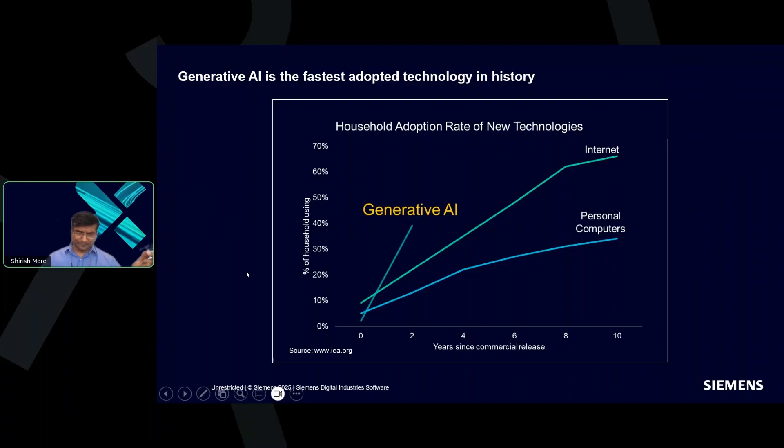So when we talk about AI at Siemens, we are not only talking about generic consumer AI or experimental prototypes here and there. Our focus is on industrial grade AI—AI that meets the strict requirements of engineering workflows. Yes, there is statistically predictive behavior going on, but how can we make it more deterministic, and how can we make it such that AI can be used in regulated environments, inside of your enterprise?

So what makes Siemens different is that we understand the product data, and we understand the engineering context and domain constraints that consumer AI models do not capture. In the case of Siemens, our goal becomes to help customers build a truly sustainable digital enterprise, where AI is grounded in historical data that was approved and released. The AI is grounded in reliability, security, trust, traceability, and industrial value.

And what that means is that industrial grade AI enables customers to trust and scale AI across their entire product life cycle.

The power of generative AI has shown—we all know the power, right? It's learning things from public data domains, things like text, images, audio, video, code. We use our smartphones day in, day out to search things. What's really happening behind the scenes is that the AI models getting used in public data domains are using the language of the internet. That's what most consumer tools are built on. They perform extremely well, but they are trained on open, unstructured data.

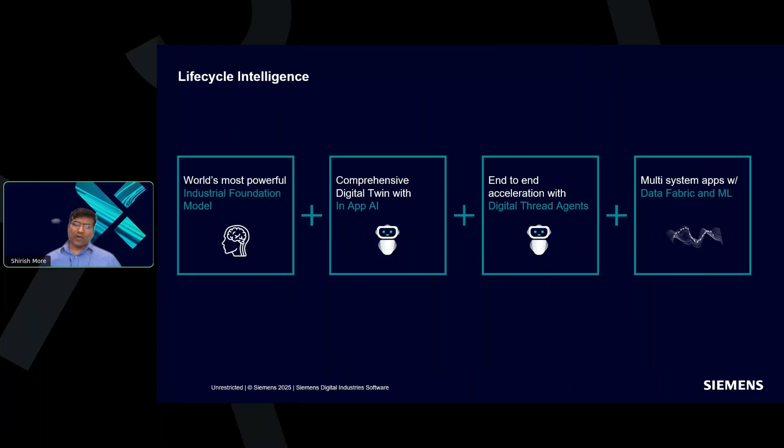When you combine these four layers, you unlock an intelligent reasoning application, an end-to-end engineering environment where data, machine learning models, and AI agents work together across the full product life cycle. That's the beauty of having AI directly inside of your application.

So let's jump into Designcenter NX and see AI in action.

Designcenter NX has been steadily advancing engineering intelligence over multiple releases now. We were in fact the first CAD product in the industry to introduce adaptive UI, or AI-powered capability, long before Gen AI or generative AI became mainstream. And that early innovation was recognized.

You can see that we received a number of awards, and since then we have expanded those predictive AI capabilities in every single release, adding features like selection prediction, region recognition. We got some nice Discovery Center recommendations going on based on how other users in the community are using AI and NX applications, all designed to help users realize efficiencies throughout their product design lifecycle. We help users automate repetitive steps and make expert workflows more accessible now inside of NX.

And now, the rightmost column there, with the introduction of generative AI, we are now entering the next phase, wherein we are bringing Copilot inside of Designcenter X NX, as well as we are introducing workflow guidance, wherein the Copilot and agents can suggest things as the designers are working in NX.

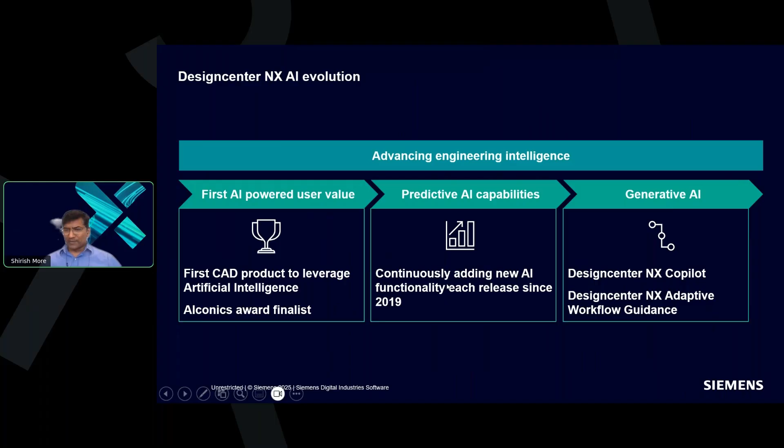So let's jump into Copilot. Copilot is our engineering-focused generative AI that brings expert-level guidance directly inside of the NX application. It interprets the user intent, and it can translate the prompts into domain-specific commands. You will see both in NX and in Teamcenter how the user doesn't have to go and search for commands.

The user can just say, I am working on this design, can you help me optimize it? And it understands the intent and then generates a nice list of things the user should perform. So there are some nice things going on here.

Behind the scenes, we are leveraging a specialized model that was trained to understand the engineering language, as well as translate those prompts into APIs, which can then execute the commands. So in the end, the result is much faster execution of a complex task, reducing onboarding time.

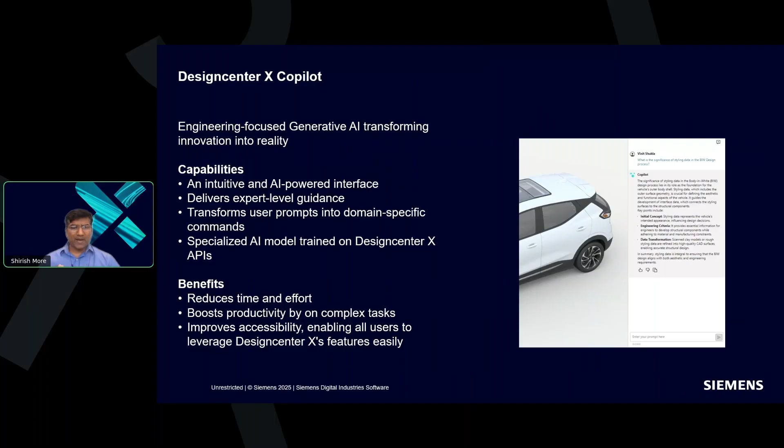In a number of these videos, I myself have authored this to show how, even though I've never worked on certain areas in NX, I'm getting help from Copilot, and it really helps reduce the onboarding time, improves the accessibility to the knowledge that Copilot has learned from technical documentation, from industry specific best practices, from historical data. And that's the power of having the Copilot inside of NX.

So here is a quick demo. You can see how I'm working against this automotive early concept design, wherein my task is to optimize the luggage volume. And on the right hand side, I have my Copilot up and running, and I'll play the video.

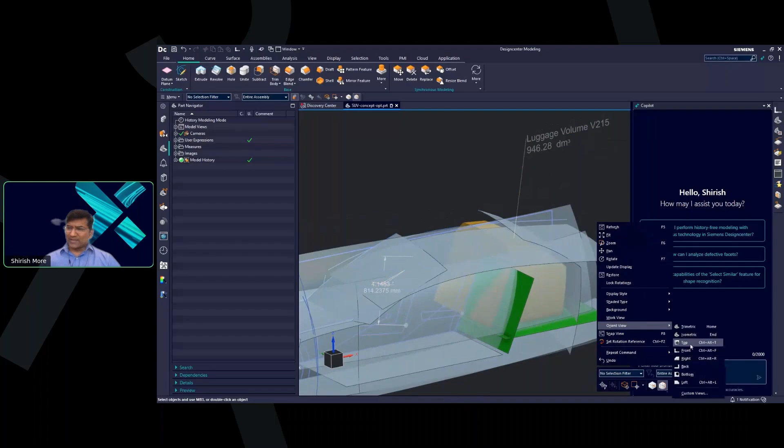So you can clearly see I got some concept surfacing that I got from the studio department, and then I'm trying to optimize my geometry here. So you can see I'm saying, I need help optimizing the volume using Design Space Explorer.

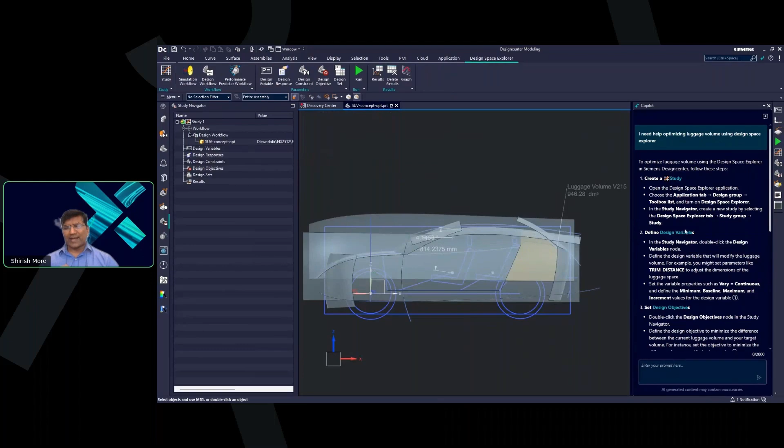So clearly the Copilot says, alright, I can see what you are working with, here are certain steps. And what you'll notice is that as the Copilot is giving suggestions to the user, I can directly ask the Copilot to invoke the command as well. It looks at the configuration that I have going on and suggests certain things.

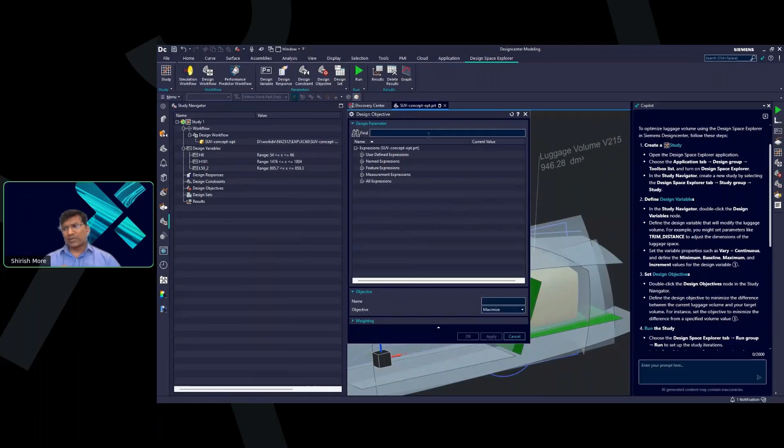And it came back with a nice sequence that says you need to follow all these steps if you decide to optimize the luggage volume based on the design variables, objectives, and constraints. And you can clearly see, at least with the release I'm showing here, it's allowing the user to click on the commands that the Copilot is recommending.

But in future, based on where we are heading, you can clearly see that I can look up a historical data set or some best practices, and I can even start suggesting the range. If this would have been a sedan versus an SUV, I can look up the requirements or standards and start suggesting those parameters directly.

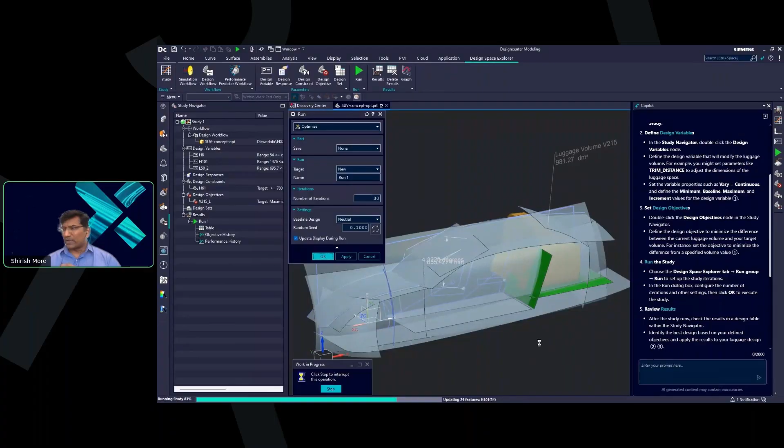And now the user says, I'm satisfied with the steps that you recommended, please go ahead and run the optimization for me. And it came back with the results. The Copilot is saying that once the run is complete, launch the results, go through all the different solutions that I tried to converge to.

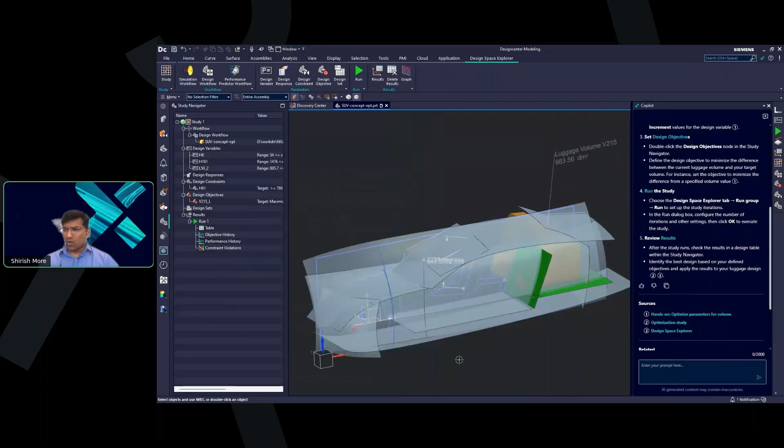And then the green one there is the one that I think you should really go with. And then the user clicks on it, and you can see that the volume has been optimized based on all the different design variables, constraints, and objective that the user asked the Copilot to use.

So that was a quick demo just to give you a glimpse into how we see Copilot going forward, helping designers. And just to give you some insight into the architectural components, we basically trained the large language model here using some of the historical data as well as some of the application specific best practices.

We also trained a small language model that understands the responses and allows the user to directly invoke the command. That means, as you saw in the demo, I was able to just click on what the Copilot was suggesting.

And in future, I can say, well Copilot, just go ahead and do it for me, and we can still run through the same steps and execute those commands in a form of an agentic AI architecture. But you see where we are heading from a Copilot perspective.

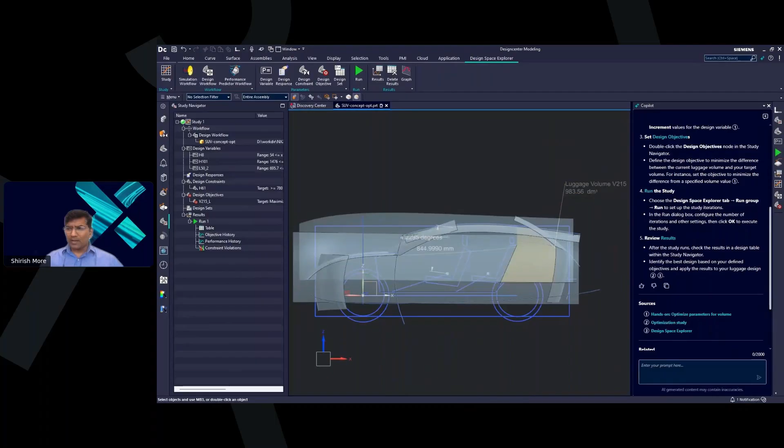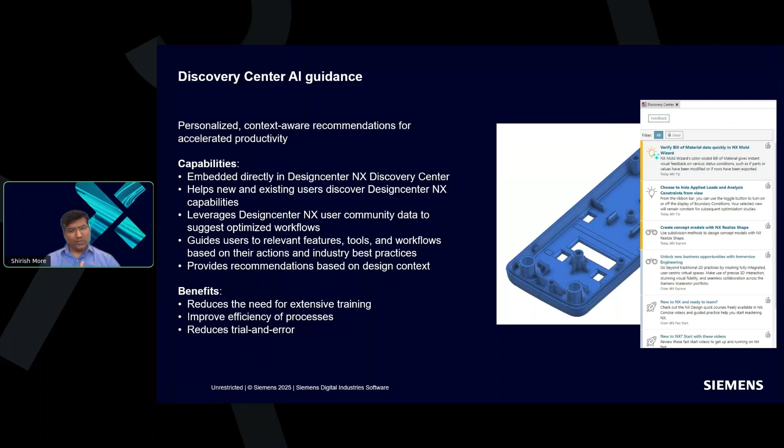It starts giving recommendations and tips as the user works on his design. It learns from user behavior, matches it with usage patterns across the globe, finds similar users, and brings back tips and techniques inside the Discovery Center to guide users toward the most relevant tools, workflows, and best practices. You can see where this is heading, generating new content and recommendations based on the context in which the user needs help. This reduces training needs, speeds up task execution, minimizes trial and error, and helps both new and experienced users become more productive much faster.

Next, I'd like to highlight a predictive AI capability: command prediction. This uses AI to anticipate the next step a user is most likely to take, based on the user's history and successful past patterns. It prioritizes the most relevant commands and detects repetitive behavior to streamline workflows. This reduces clicks, accelerates design tasks, and helps prevent errors by guiding users toward the most optimal action or command throughout the workflow.

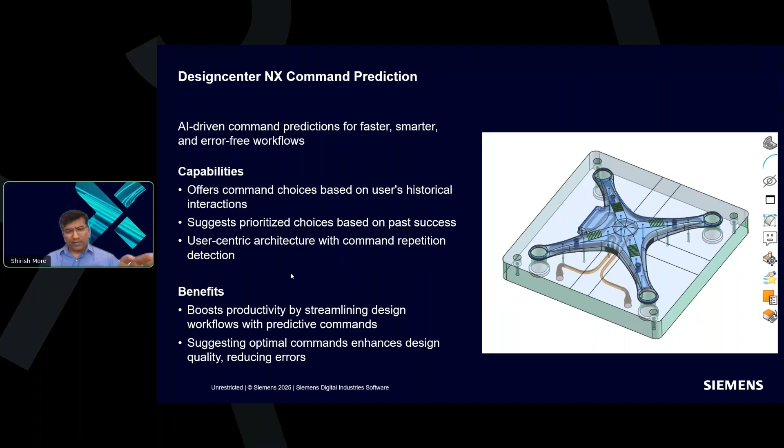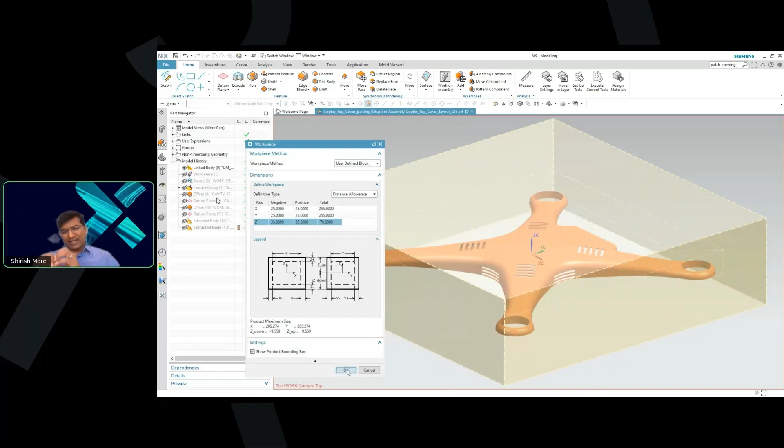You'll see a quick demo of a real world scenario where I tried to create tooling for this drone cover, and I have never used Mold Wizard. Throughout the demo, I'm not even in the Mold Wizard application, right? I just click on the third mouse button - that's how I've configured my AI engine - so wherever my mouse is, it shows me the next command or sequence of commands I should use.

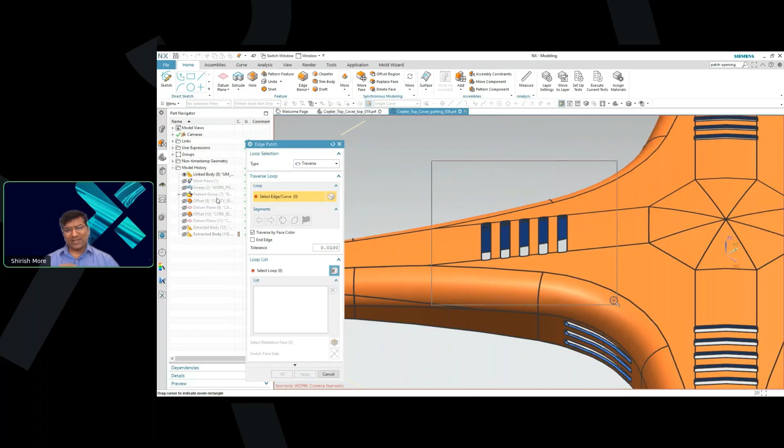So when the user says 'I need help,' it shows exactly which command to use based on the previous set of commands the user might have used. It uses some nice advanced predictive AI capabilities - it uses Markov chains, for those familiar with some of the AI techniques. Maybe the user has used Mold Wizard previously, but then it learns what he used it for, and it detects a pattern.

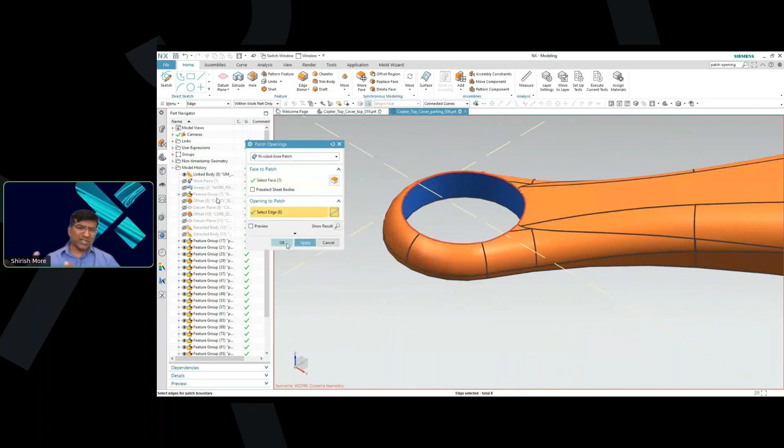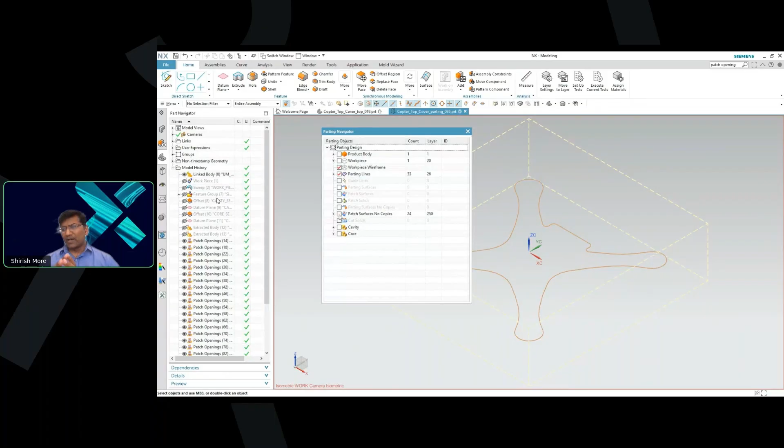In this case, it gets to a point where it can predict exactly which command the user might end up using. It's very powerful because, throughout the demo video, I hardly went into the Mold Wizard application, or had a cheat sheet lying around as to how to use the command. It has learned from all previous actions, and it reaches a point where it can predict exactly which command the user might use in this context - creating tooling for this particular drone cover. That's the beauty of using AI in context, suggesting things to the user while they work.

So that was a quick demo to show that, while the previous two examples were generative AI, I wanted to give you insight into how we're using predictive AI as well.

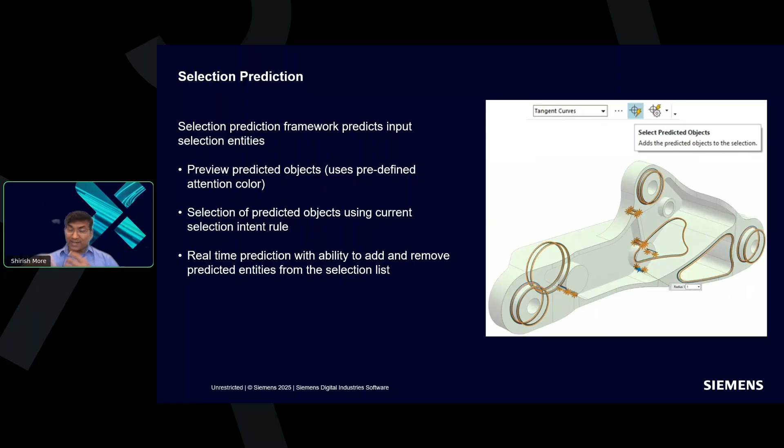Yet another powerful predictive AI capability is selection prediction. A number of times designers end up picking things around, so with selection prediction, we use AI to anticipate which geometry the user intends to select next. It previews the predicted objects, gives a preview to the user, allows the user to select those predicted objects, and then you can perform any operation on those selected objects.

This dramatically reduces the manual clicking, searching for things, zooming in, zooming out, and a lot of other things, because AI can start predicting based on the command you are using what you might select.

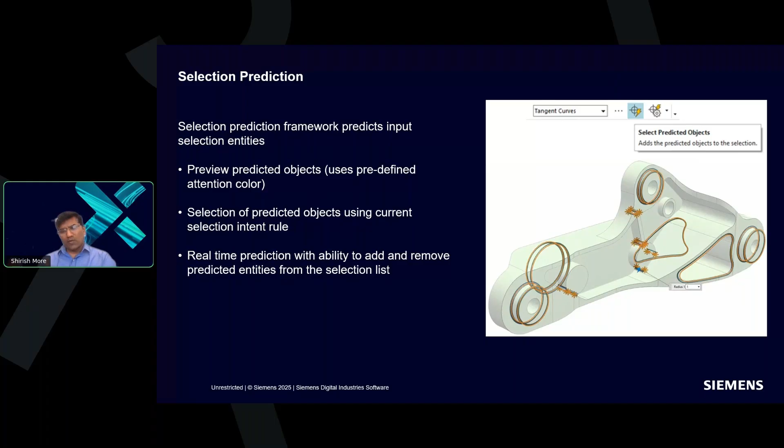Here is a quick demo wherein the user is trying to create an edge blend for this aero component, and he selects the inside profile. The AI predicts that if you're going to apply blend for that profile, it will suggest you need a blend for other similar profiles. And the user says, oh, I like what you are predicting.

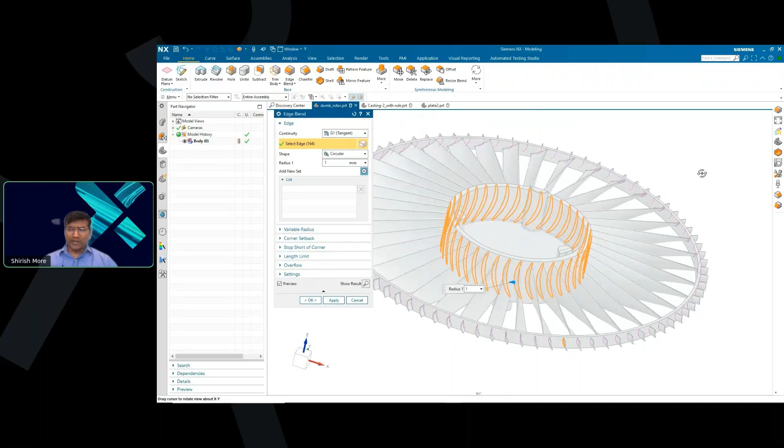In 2 clicks, the AI was able to predict the similar profiles. While the user is still in the same command, he applies the blend for the outside edge, and now the AI predicts: what about the other edges? Do you want me to apply blend or select those entities for you as well? I bet this action would have taken a number of clicks, zoom in, zoom out, and you would have missed one of the edges, and downstream somebody finds that issue. But in that demo, you saw how with just two clicks I was able to predict and select all those entities.

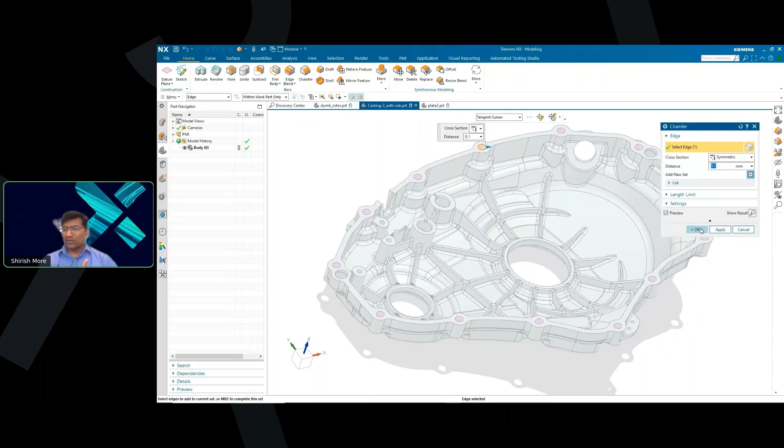Here is another example wherein the user is trying to apply the chamfer on those mounting holes, but the AI predicts that if you're going to apply chamfer, all those other mounting holes are similar diameter, are normal to that top face, so it will help you apply the chamfer to all those mounting holes.

So these are some nice examples wherein day in, day out, a number of users are using command prediction, selection prediction, and so on. Now it's like AI is embedded seamlessly, helping speed up a lot of things for the user. All right, moving on.

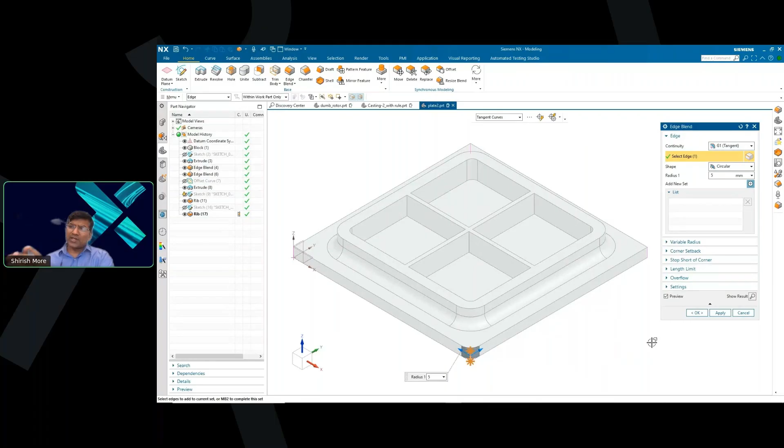Very similar to command prediction and selection prediction, we also have something called select similar components, wherein there are a number of use cases. I'm going to do a demo with a very large assembly wherein designers would like to narrow down their selection, parse through different components, and declutter the complex assembly into a manageable set. Majority of the time, the user has to go into the assembly navigator, expand the components, and select those individually, or do some manual selection.

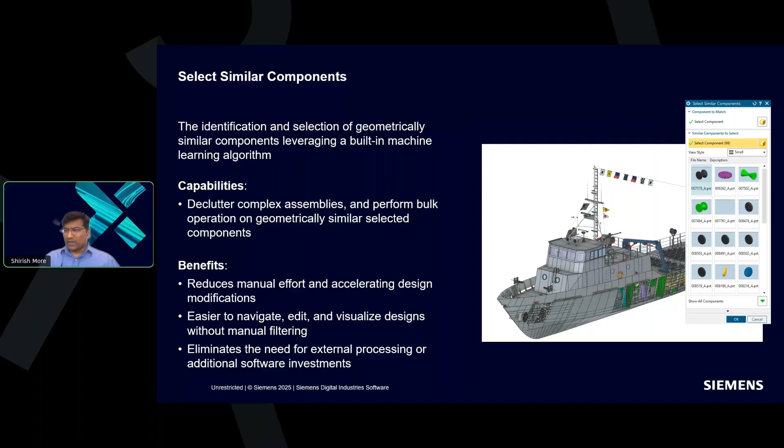But where the AI really comes in handy is when the user is loading the data set. We apply some nice AI algorithms and recognize the shape of the components, geometrically similar components, and then store it in memory, so that the next time the user says 'can you select similar components, use this as a seed component,' we can automatically select all those components for the user. Here is an example.

The user is working against 17,000 plus components, and he would like to calculate the weight of all the similar components that are on top of the boat. So he invokes select similar components, and we process all of this data. You don't need any additional infrastructure — it's all happening in memory.

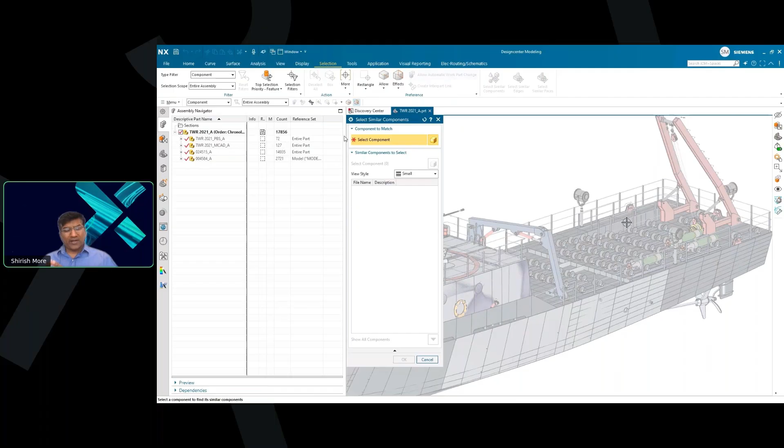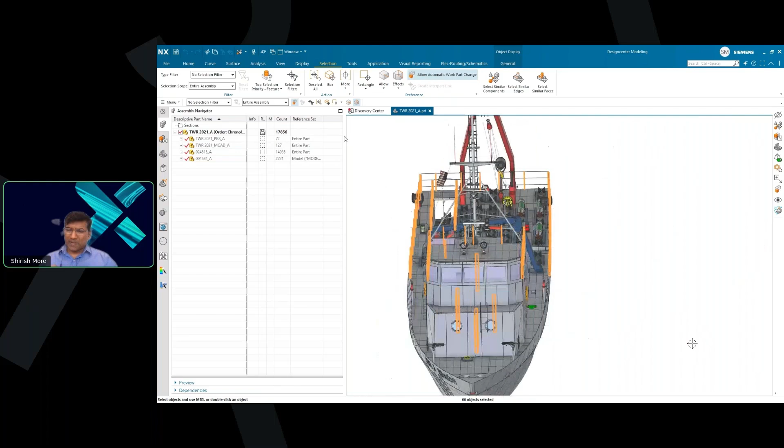We apply some nice AI techniques, and when the user selects one of those seed components for finding similar components, you can see how AI predicts and selects all similar shaped components that match that criteria. In one click, he was able to bring all those components, and then he can deselect, select additional components, and apply any operation.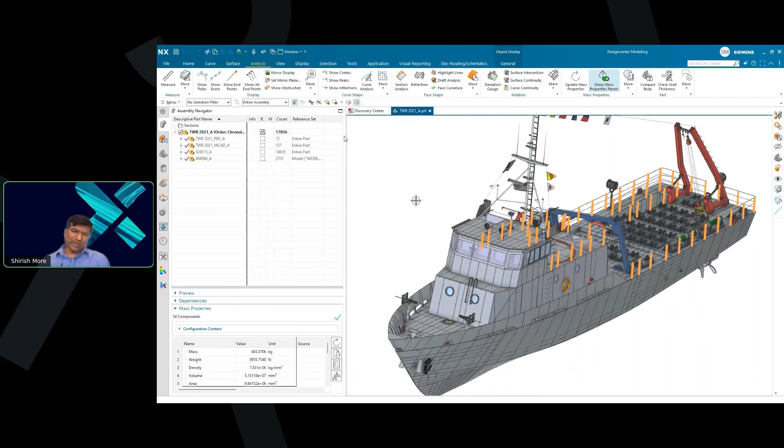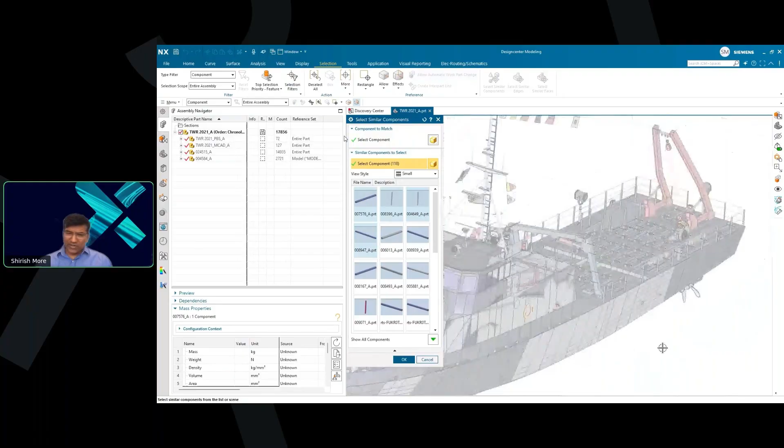In NX, you can apply operations — in this case, the user calculates the weight for all those similar components. So you can see how easy it is for users to use techniques like these going forward to simplify selection and perform operations, both for selection prediction and for selecting similar components. I'll move on, but this also demos other things, like when the user is interested in horizontal or oriented components that are still similarly shaped.

Okay, and then finally, one more thing on the NX side, very similar to select similar components, we have something called select similar faces, which uses AI to instantly recognize and group similar regions across piece parts, across assemblies. It lets users locate, validate, and perform operations on similar faces in real time, and even build custom rules or custom libraries.

For example, on this slide, I'll show you a demo. If you're a user who is normally interested in beads on a sheet metal part, you can store that set of faces as beads, call it whatever you want, and then AI learns from those faces. Next time when you're working with a similar design, you can say, AI, go and find all beads because I want to perform an operation, calculate surface areas, or use synchronous technology to move those regions by 1 millimeter.

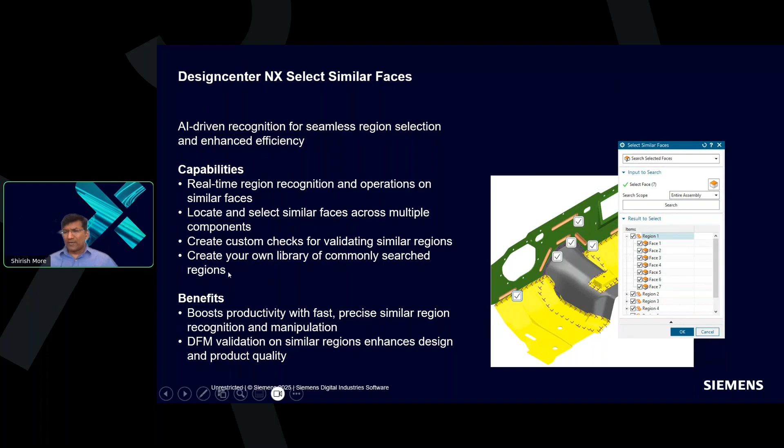So there are a number of applications wherein users tend to work on similar faces, and you will see from this demo wherein I'm working against this dash assembly for an automotive sub-assembly. I'm interested in applying, performing an operation on those beads.

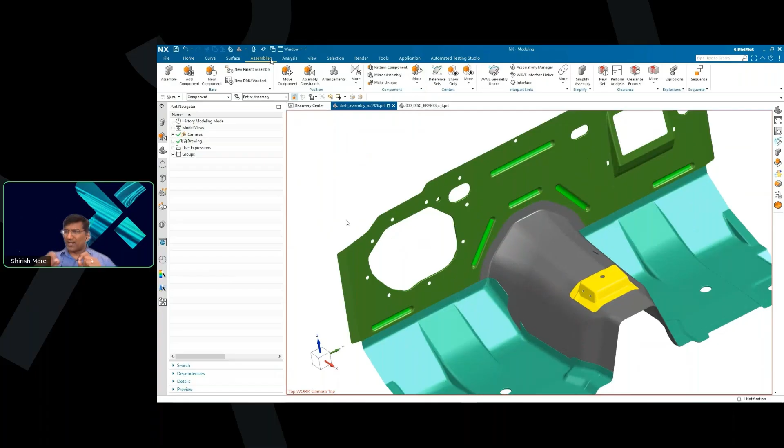Traditionally, the designer would have gone in and manually selected individual beads, and there's a lot of zoom in, zoom out, and whatnot. But with AI, what I'm going to do is say, okay, select similar faces.

I'm interested in such type of a region. So it collects all those faces, and then I can say perform search, and it's going to go in and find all similar regions. Once selected, you can say, I like all the regions you found, but I'm interested in maybe a couple of those regions, maybe in this case the middle ones, and AI, go and find only the regions that I'm interested in.

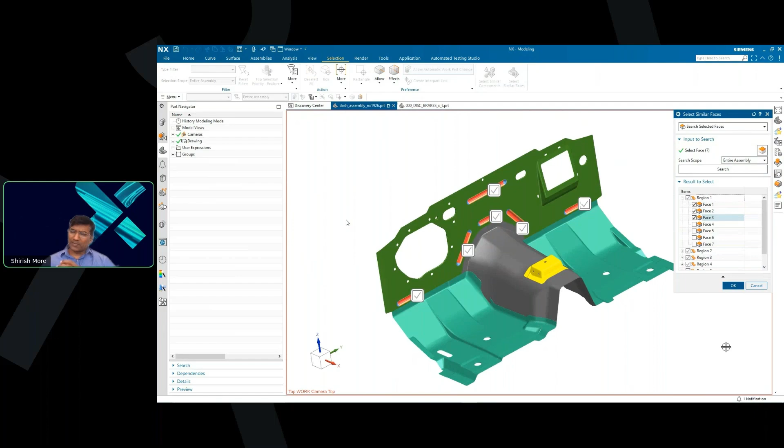So you can see how advanced AI algorithms we are using here to help designers speed up the overall selections, and then once selected, you can perform any operations against those regions.

All right, so that was a quick run through. As I said, just to summarize, I covered just a few of the key AI capabilities inside NX, but there are many more built into the product. I just wanted to give you a glimpse into how we are leveraging generative AI and predictive AI. These are all features that run inside of your NX application. For anyone on the call who is interested in exploring further, the NX documentation provides detailed guidance, examples, and a full listing of all the AI-driven features that are available today and how you can take advantage of them.

Now, let's shift from NX to Teamcenter and look at how we are bringing AI directly into core PLM workflows. Just like in NX, our focus in Teamcenter is on in-application AI, that AI embedded inside of the Teamcenter tool which users can rely on every day. These capabilities that I'll demo will show you how it's going to help users navigate complex data structures, automate routine tasks, and surface insights that normally take time to find.

So the first thing I'd like to demo is Teamcenter Copilot. Very similar to NX Copilot, Teamcenter Copilot brings truly context-aware AI inside of the PLM workflows. You can clearly see that the Copilot understands the context in which the user needs help—it can be the document, the bill of material that's displayed on the screen, or he might load an assembly in the embedded 3D viewer and then perform operations.

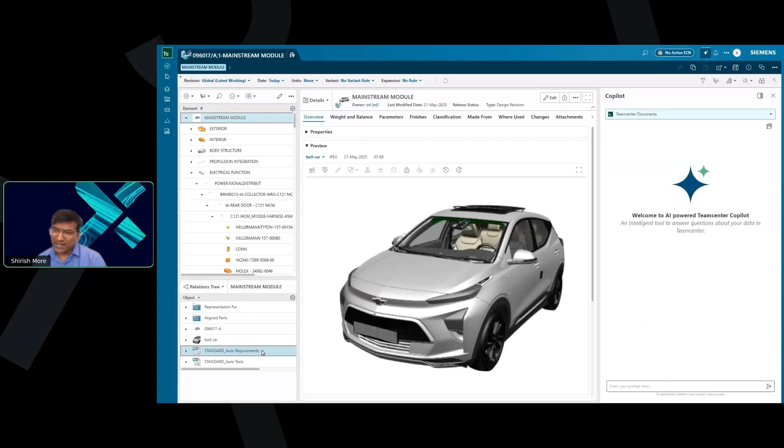So here is a quick demo wherein I'm in Teamcenter. I've got this Chevy Bolt loaded in my session, but I also have a requirements document associated with that particular vehicle program. In this case, I said, Copilot, I've got these requirements, I'm interested in finding some requirements. Can you parse through this entire document and summarize some requirements that I should be aware of?

Traditionally, the user would have gone in, or he might have created requirements objects in Teamcenter and other things—I'll talk about that as well. But clearly, you can see the advantage of having a Copilot embedded inside of Teamcenter, wherein I can just say stand on that particular requirements document, make that your context, and help me understand the requirements.

You can see the user just goes in and prompts the Copilot to go through different requirements, narrowing down the focus to a particular area. That's perfectly fine. Then he changes the context.

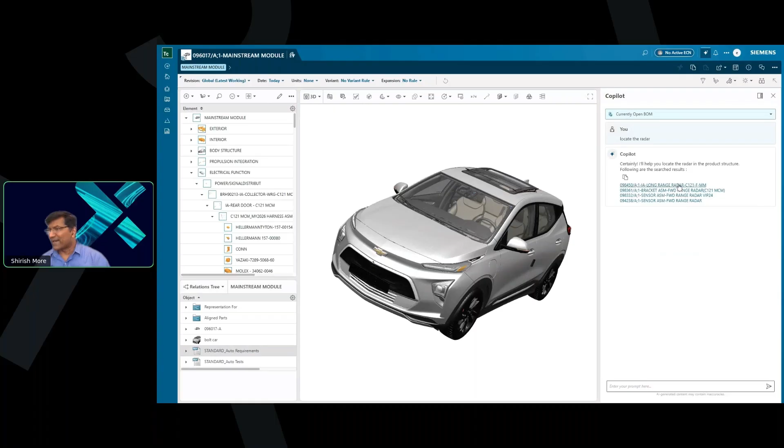You can say, Copilot, now that I understood the requirements, can you help me do things against the bill of material that's active now? So the user says, yes, can you locate the radar component and all other things associated with that particular radar?

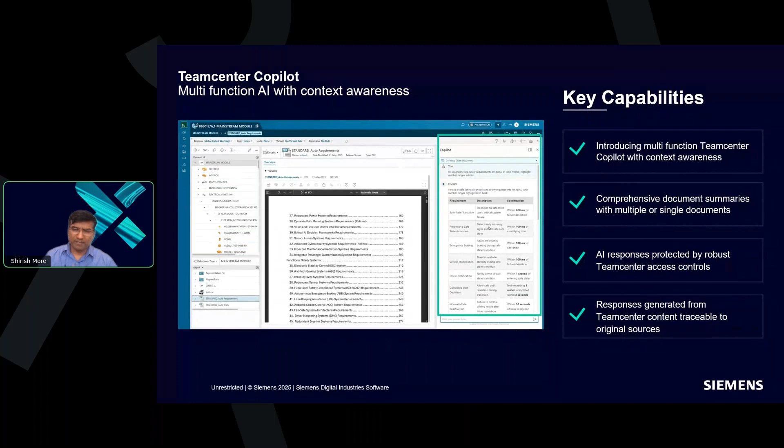Not only does the Copilot come back and give the responses, but it also shows additional things and highlights the component in the active view. That's the power of having AI Copilot directly embedded in Teamcenter for helping with bill of material searching, summarizing the requirements document, and other things.

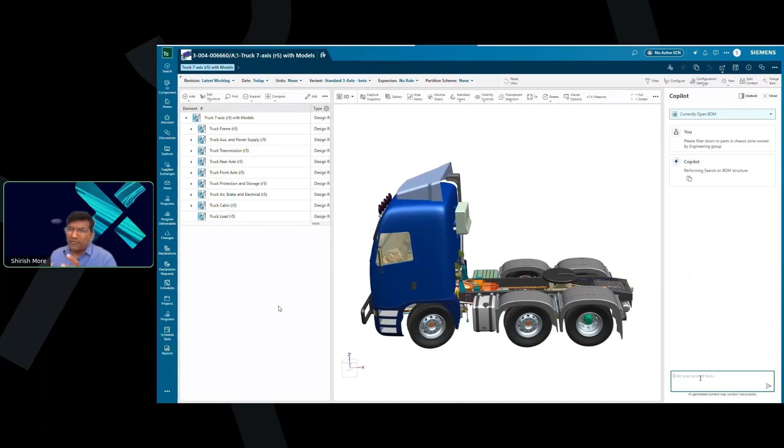Moving on, very similar to the previous demo, as a user I have this particular truck assembly loaded. Traditionally, you would have gone in and applied some compound search or compound filtering. But now with Copilot, I can just say, please filter down to parts in the chassis zone owned by so-and-so person, or owned by a particular group.

You don't have to go and apply that compound filtering using traditional search - the Copilot now translates that prompt, executes the command, and comes back with a list of things the user might be interested in. It perfectly understands the user prompts, translates them into an actionable command, and behind the scenes the agent is executing those commands and understanding the context.

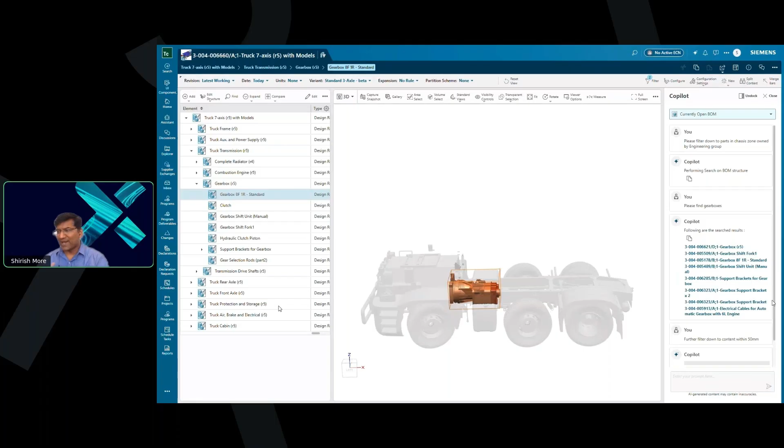There are a lot of things going on here, where now the user says, all right, for that particular structure, can you do further filtering, and the Copilot can basically help the user out.

And finally, a powerful use case of Teamcenter requirements, where what's really happening is that it brings multi-agent AI into one of the most detailed and heavy parts in managing requirements.

It can automatically import, classify, and learn from those parameters, and because it's multi-agent AI, each AI agent can handle a specific task, working together to streamline what is typically a very manual and time-consuming process.

And the result in the end is faster requirements processing, higher quality, and because AI is also monitoring things in the requirements document, it can start suggesting things back to the user.

All right, now that you've seen where we are heading, what's going to happen is that for customers listening in, AI adoption isn't just a technology shift - it's going to be a transformation in how engineering work gets done.

Many of you are already excited about AI, but they often ask me questions, and I know there will be questions after my session here - where do we start, and how can we build confidence and realize value quickly? We are here to guide you through this journey.

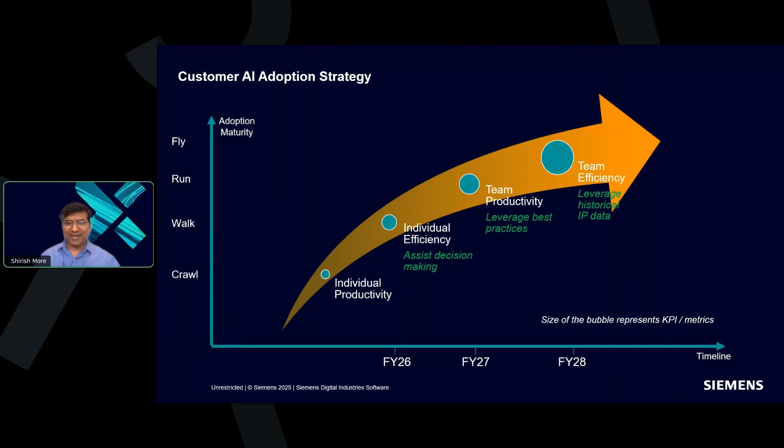Thank you so much for walking us through all that. We do have a couple of questions. The first one is, how does Designcenter Copilot interpret design intent when suggesting geometry changes or features?

For the release that's already out there, right now we have trained the large language model just to go based on the prompt. It's not looking at the design, and we are not uploading any images of the design, but you can always translate your design in a form of a prompt, and then it will understand it.

I don't know whether you noticed it, but when I was showing you the optimization scenario, I did explicitly mention it to the Copilot that I need help with design optimization task, right? But in future, we do have the ability to look at the image and reason out of that image as to what the user is trying to do.

For that, we are closely working with customers, because there are customers who would like to know, are you capturing the image of the screen and sending it to the cloud? There are certain things that we are considering, but we do have the ability to do it.

That's the reason why I said that, in my crawl, walk, run and fly approach, let's start with simple prompts and documentation, and then in future, as the architecture evolves, you can decide to gather context on the fly and understand the context in which the user might have those questions. We can easily do that. I hope that helps from a roadmap perspective as to where we are heading.